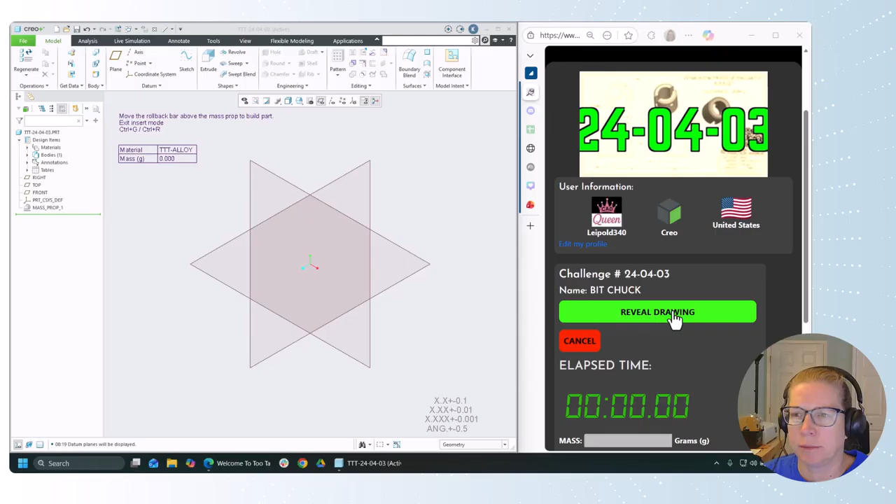It's a level 3, although I think it's going to go pretty quick. We're going to do just a couple of extrudes, a chamfer on this one, and then I've got a little bit of a conversation at the end about maybe future plans on this one.

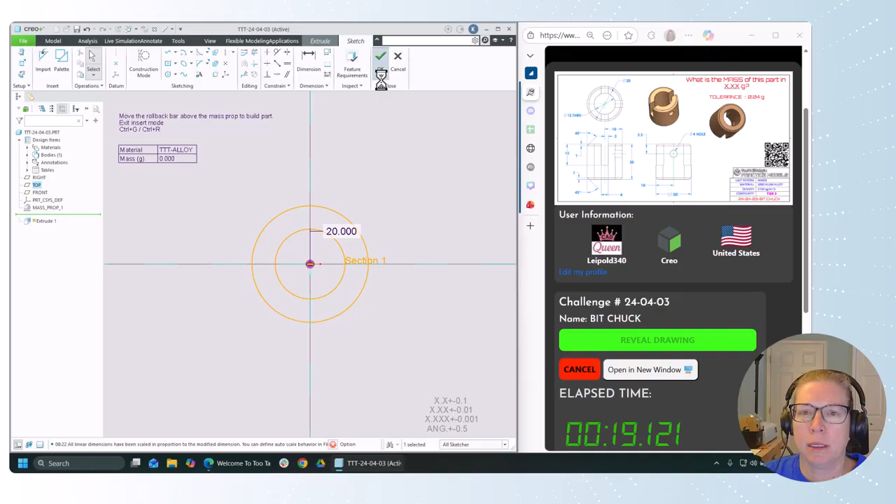Here we go. So we're going to start with an extrude on the top plane, and we're going to add 2 circles, 1 and 2. Middle click to finish. Make the inside one 12 and the outside one 20 from the top view. It gives us 20 automatically. And there we go. Control D.

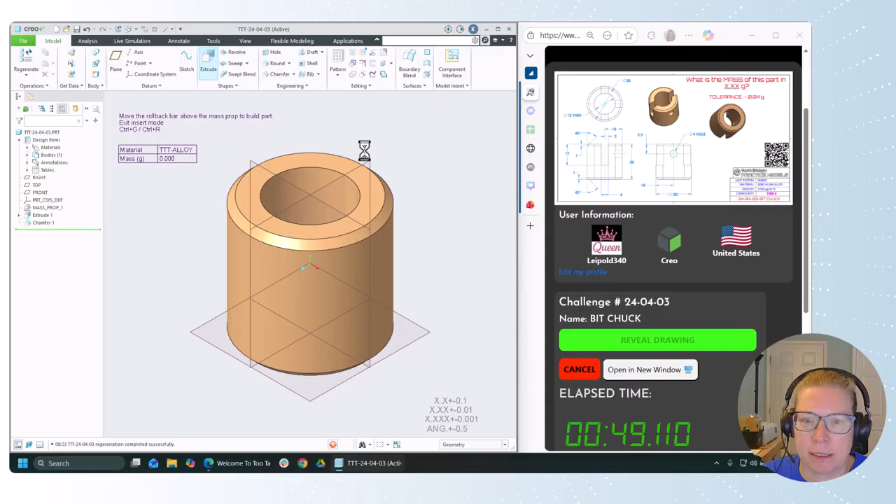And we're started. All right. Let's go ahead and drop the chamfer on. I prefer 45 by D. If you've got a 45-degree chamfer, hold down Control to get both. It shows up better on the drawing, and because we can just turn on dimensions on the drawing, that's worth making that step here.

Okay, I'm going to make this tangent and a depth width of 4. And we're going to flip that the other direction and remove material, and the depth is 12.

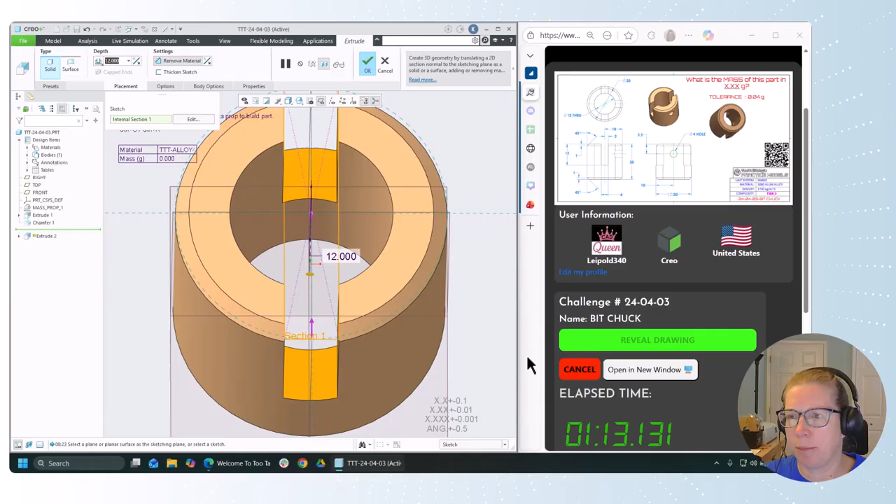All right. Last feature here is adding a hole onto the outside. You know, I love those radial hole placements, so we'll use our draggers. We're going to set it as 0 degrees around the outside, and we're going to locate it down 5.5. Give it a diameter of 4.

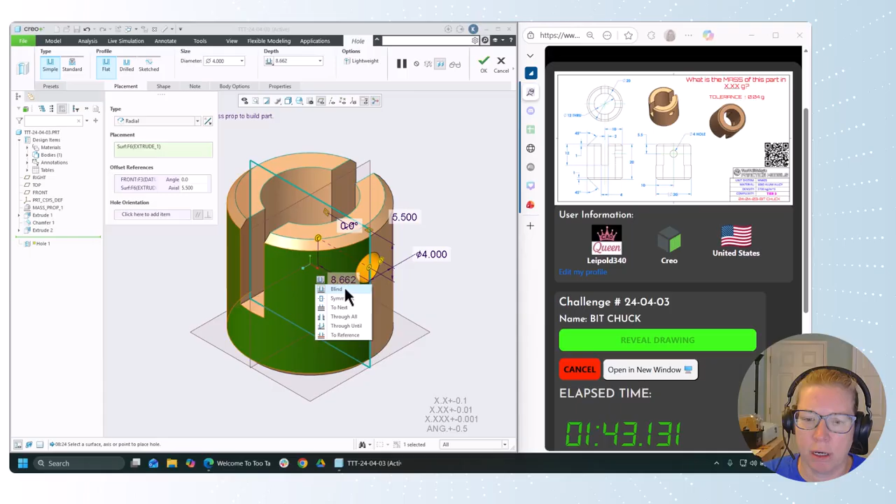That's in the right side view. And I've noticed lately that when you hover over the dimension, those symbols will pop up right there. So I do like that. Middle click to finish that one. We can turn off our planes.

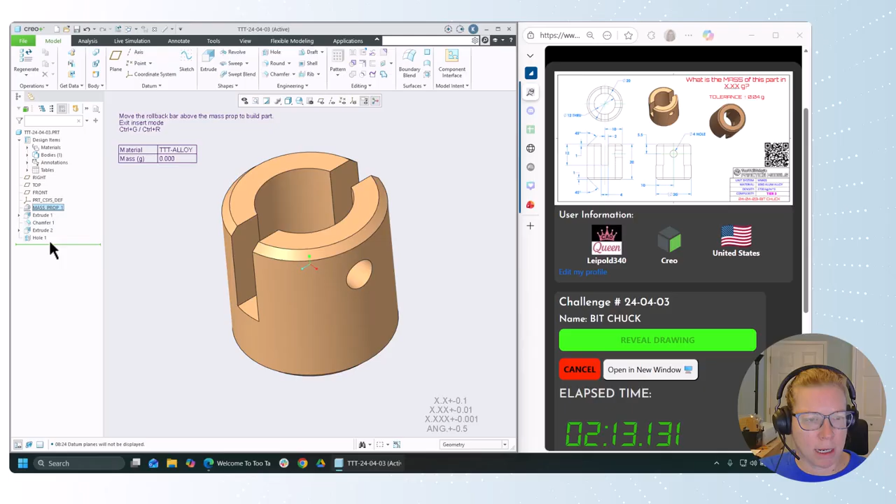All right. So I do notice we got this 10 and 20. Like the location of the outside to the center line is dimensioned on here quite a bit, which is a little surprising to me. Actually, let's get our properties.

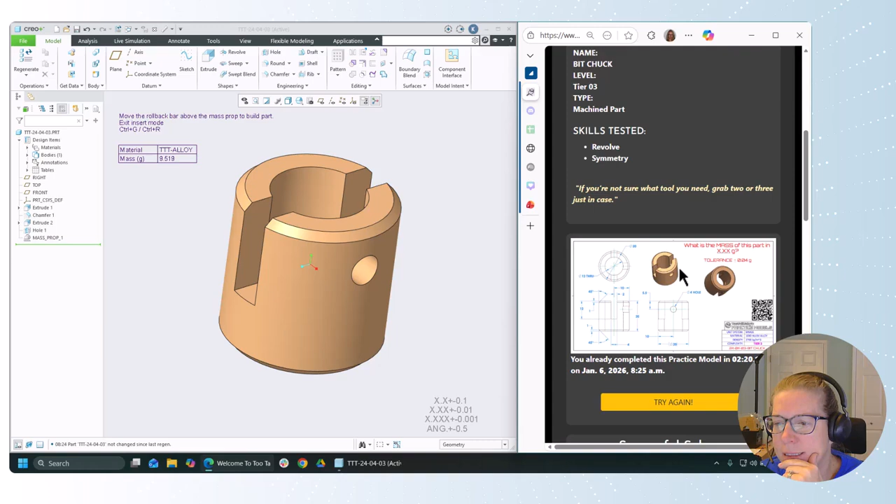So what was I saying? I'm so sorry. There it is. Okay. The 10 is dimensioned here, which is surprising to me. A lot of times we have our center hole located relative to the outside hole, and just located based on the fact that there's 2 center lines that intersect. And so we have an inside hole that is located relative to the outside hole, and they have the same center, but there's no dimension.

Is it 0? Is it 0.0? Is it 0.00? These drawings don't have tolerance blocks, and that's because that's not what they're made for. But an interesting application of GD&T is the ability to control the location of one hole relative to the outside surface. So I think this might be a really good opportunity to take this part, the next step, into a drawing and applying some GD&T onto that.